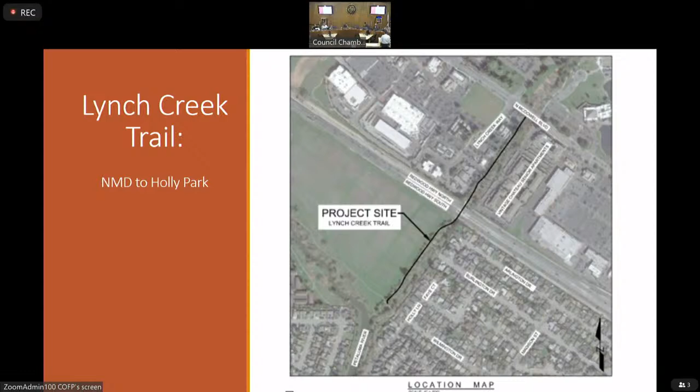So for North McDowell to Holly Park, we're going to make improvements at the roadway there, and then going in, it's a degraded asphaltic concrete pathway, so we're going to want to take care of the actual pathway surface, as well as drainage, and as well as putting in some striping. Some of the items here: we work with a biologist to go through and cut back the vegetation, do that at the right time of the year. We're going to clean the drainage, we're going to seal the cracks. And then the mitigation for those cracks is to put an actual geotextile fabric on top of them and then put another layer of asphaltic concrete.

Gonna try to do as much graffiti removal, just clean up the whole thing. We want to make it sparkle. And the wayfinding signage may not be in this initial contract, but Bjorn has a lot of really good ideas, and we definitely want to do the right thing to get people inbound, outbound, on the pathway, and then marking and striping it.

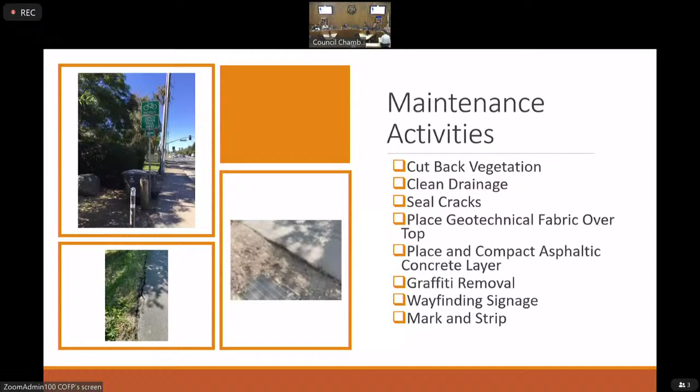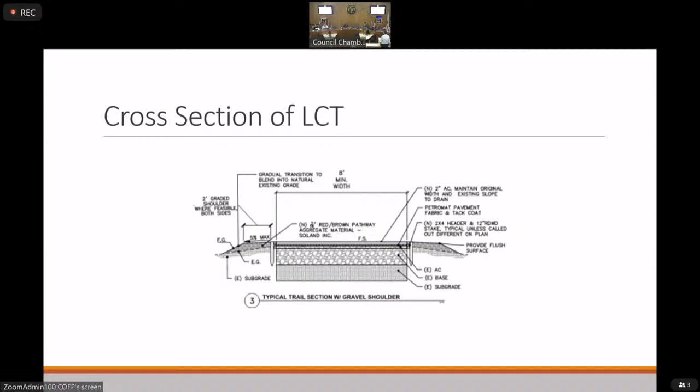And then as we go up to North McDowell, from the very first time I rode there, I never liked that intersection. So we're going to go ahead and do some striping and lay down a little bit more asphalt there to improve the connectivity and the usability of that. So if you're on your cargo bike with a trailer, can you make that maneuver? Yes. Now you can get on the sidewalk.

And I will say on this whole area, the connectivity of Lynch Creek Trail to Lucchesi, we have a separate project that we're going to look at the improvements that are needed, and we've been very fortunate to get some money from SCTA to do that work. The contract has been signed, so you're going to start hearing about that as we move into 2024. And Bjorn, don't hesitate if you think there's something we need to add on any of that.

But just in a nutshell, what are the improvements we can make? We can make improvements on the signalization. We can look at a future overpass. We can look at going under. There's a drainage culvert there. They do that on the peninsula a lot, getting under 101. So we're going to make improvements on that whole connectivity.

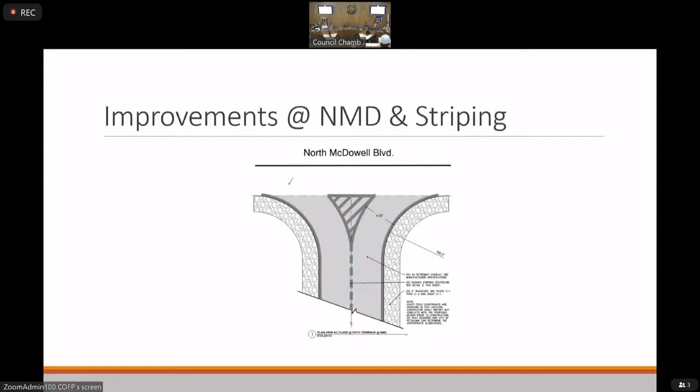And then we go from Payran to Edith, and this is going to be very similar to what you've already seen, the connection from River Bend or Edith Court to Lakeville, and also what we did by Holly Park. So we're going to improve the ADA access to Payran, which for me is very important, just getting up to the street. We're going to have an 8 to 10 foot concrete path. We're trying to get it as wide as we can within what we can work with there. Have the 1 to 2 foot quarry fine stabilized shoulders on that. Again, graffiti removal, look at the wayfinding and mark and stripe.

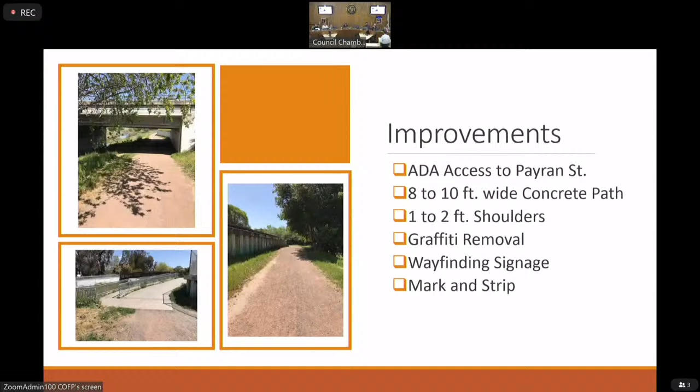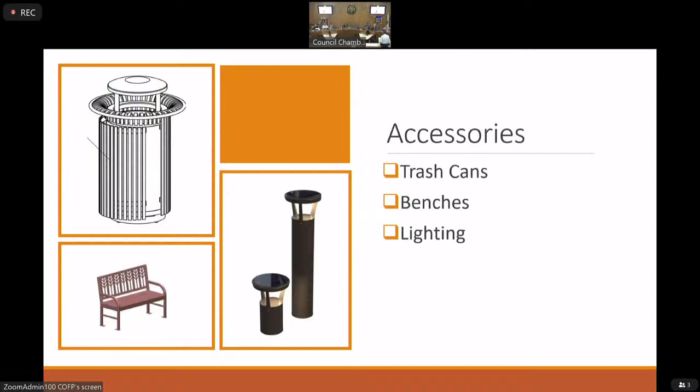So we're gonna have trash cans in locations. We've got 5 benches, and then we've got the lighting system similar to what is at River Bend, and that's going to be going in. That is solar. So, with that, I'll take any questions that you might have.

Thank you, Ken. Pamela, can we start with you? Thanks, Ken. That was great. Glad to see we're polishing this up. Like you said, I think it is a gem. What kind of lighting were you thinking is going to be included at the underpass? I wasn't quite sure if there was something on the slide that I missed. I saw the solar along the other section. Yeah. Wow, you drilled right in on that, Pam, and I thought about that, like somebody is going to ask it, so thank you.

So we've got a light standard up on the bridge. The difficulty is getting a meter, because we obviously can't do solar. Although I was sort of thinking, could we put a panel somewhere out there, but then vandalism and people stealing it, and that got too complicated. So I'm like, well, we're just going to go hook up to the light standard. We might be able to do it. It's kind of a separate project.

I looked at it on the arch. I'd like to get lighting on the arch, and with PG&E, we figured out how to do it. We just tie in here. It was very simple, and PG&E says no. The agreement, and Gina's going to know more and get into the details if you really want to know about it.

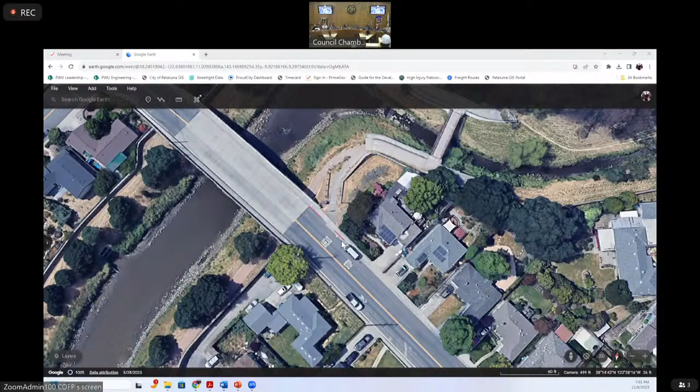Okay. Yeah. So then going towards the Washington side, there's a truck that usually parks there, and I think there's an open cyclone fence area now. But yeah, there is this bush. It's hard to see around. Oh, I see what you're saying. Yeah, hedge. I'll have to see. I don't think that's city property, but I'd have to check on it. We can look at that.

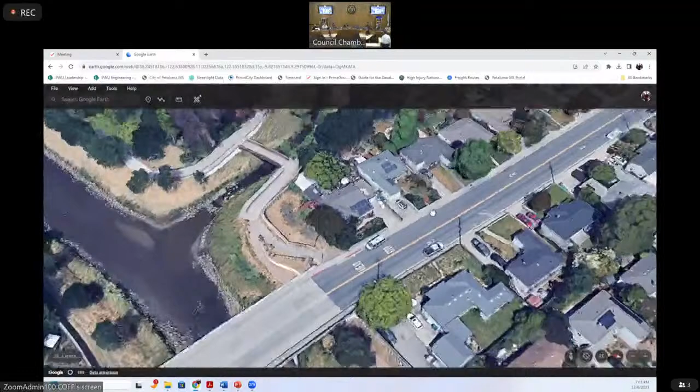I actually think maybe some more paint in the road there. We could do something to try to bulb that out. In fact, that was an idea. I think Pete might have mentioned it, but just try to do a quick build bulb out there and put some vertical elements to give a little more presence to it. And I met with a neighbor. They were nice. They didn't mind losing the parking space. I was like, good. But that's a good idea. We could definitely do something there.

And I will say, we've spent a fair amount of time just on the striping in this section of Lynch Creek Trail. We don't want people whizzing down there, so I'm trying to narrow the pathway, put speed gradation markings in. We use it for motor vehicle traffic. We did it on I Street, so I'm doing the same thing here. I get complaints that those electric bikes are going too fast, and so just to give some presence on the pavement there, so it doesn't look like a highway to cyclists that are going really fast. So, yeah. Thank you.

Yeah. Kelly, I know you just arrived. Do you have any comments to add? Okay. So with that, we'll open public comment. The public is invited to make comments on this item. Public comments are limited to 3 minutes per person. If you haven't done so already, please fill out a speaker card and bring it to the clerk. Clerk, have you received any comments on this item prior to the meeting? There were no public comments received. Thank you. And I don't have any speaker cards, right? If I may. Please. Fill it out.

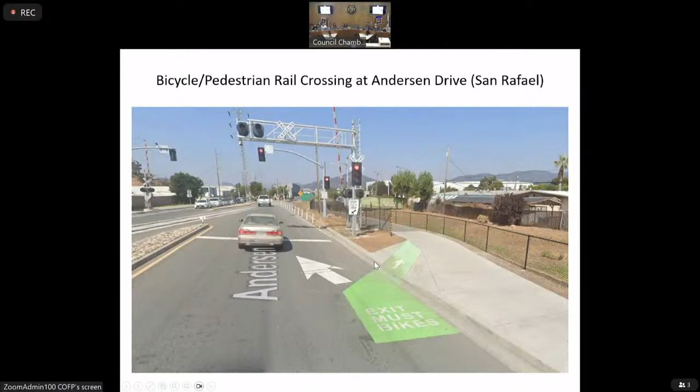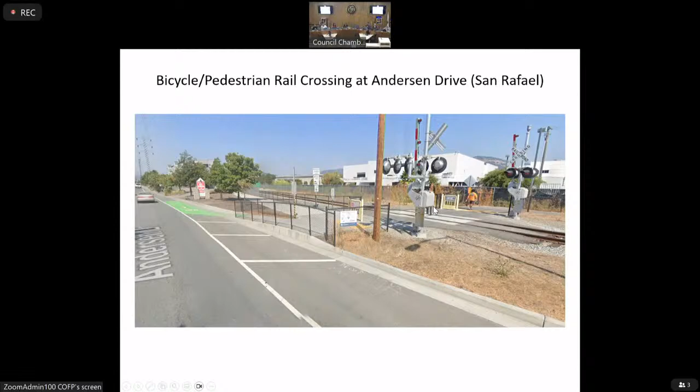Got some images here. This is what those ramps look like down in San Rafael, where you access the sidewalk. This is what one of the crossings looks like. You can see someone actually taking advantage right there. In the other direction, same idea. A ramp up before the rail crossing, and then again, here's your more controlled rail crossing. So that's just trying to help you visualize what will be in place on North McDowell Boulevard, again, with the ramps in both directions.

So a couple things I wanted to get your feedback on tonight. Again, the North McDowell Boulevard frontage improvements. So we are looking again just at the project site. No changes would be made to the southbound direction on North McDowell Boulevard. So that will still be the class 4 protected bike lane that we have in place today, up until that signalized crossing with the new and improved sidewalk and rail crossing.

So we want to focus in on this frontage on the northbound side of North McDowell. And I have a couple of cross sections there. And then I also want to get some feedback on Corona Road. I do not have cross sections there to share. But we'll go to North McDowell first.

So again, there's been a lot of back and forth between the city and even within the city, talking to fire about their requirements to be able to access the buildings on the project site. And we essentially have about 16 feet to play with here, where we can accommodate some combination of bicycle and pedestrian facilities and landscaping strips.

So this is our recommended option. This is consistent with the feedback that PBAC provided back in 2020 to make the most of that width and basically maximize it by providing a two-way multi-use trail that would allow people to walk and bike in both directions along the north side of North McDowell Boulevard along the project site.

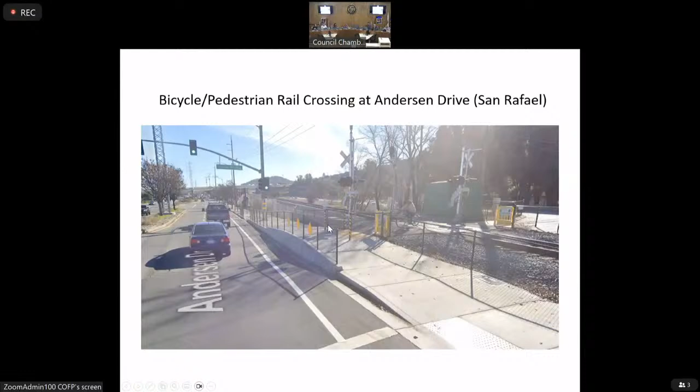Gosh, I haven't seen this lately, but I do remember it from a bit of time ago. I'm looking at the page which is titled North McDowell Boulevard, Corona Road to SMART Tracks. I guess I have questions. If we were to do option number 1, where we're talking about a multi-use trail for bikes and peds, would it be striped? Yes, we can stripe it. We could do edge lines, and a dashed center line would seem appropriate.

My second question is, are there going to be power poles allowed in this area? No, I would have to double check, but I believe all of the utilities are being undergrounded. Okay. Looking down at the very bottom of this page, you referenced this Class 1 trail would provide adequate width for two-way travel for people on foot and bike.

What constitutes adequate? So for a class 1 trail, the minimum width is 8 feet with 2-foot shoulders. And so in this location, we have 12 feet. And the planting strip could count as shoulder space. Basically, you need a little bit of a shy distance or a buffer from any edges of curbs or vertical objects. But 12 feet is sufficient. Great, thank you for that. That's all I have. Thank you.

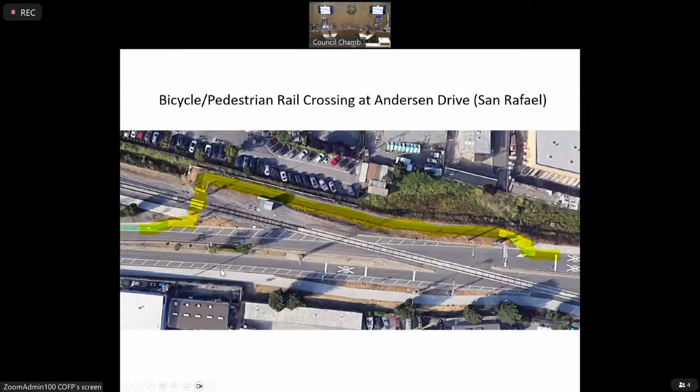And then can you go back to the other one? I'm leaning towards this one, but on this one, is there a way that the planting strip could actually be some sort of water catchment or something like that too? So that it's not just channeling water off, but it's actually catching it? I believe so. Could double check on that, but I believe so.

Okay. And then would there be any trees over on that side of the street too? And if so, where would they be, in the 4-foot planting strip, or over to the right of the 12-foot multi-use trail? So I'm not sure if we have any in the planting strip. Tree placement on this project has all been driven by fire for their access requirements for a ladder truck. Because the buildings exceed a certain height, that triggers some access requirements.

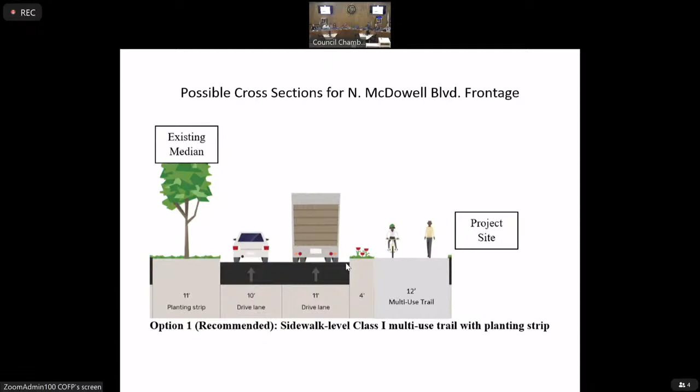I know we are working hard to maximize the tree opportunities. I know there are some on the project site, to the right of the multi-use trail. Okay. Not sure if we have any here, but there may be. That's an ongoing conversation. Okay. And then on the original drawing that was included with the staff report, sorry to make you jump around here. So I was just looking at the Meridian web page on the city's website.

So my feedback is I think the 12-foot multi-use path is probably the better option, and I would want that on Corona Road as well. I share the chair's concerns about sending bicyclists up to the roundabout there. And just thinking like a kid riding their bike to school on Corona Road from this affordable housing development, would you have your kid ride their bike on Corona Road up to Corona Creek Elementary?

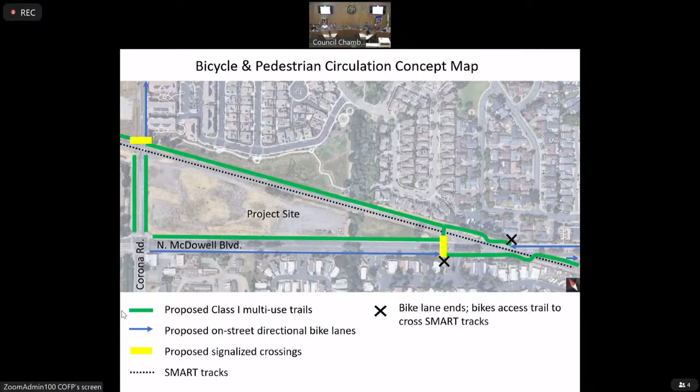It would have been nice to know where the connections would be from the new Danco project, and also the layout of the parking lot. But generally speaking, I'm inclined a little bit more towards option one. A question I have is with respect to option two, with the 6-foot bike lane. So the idea would be you'd have cyclists passing each other in opposite directions in that area? They're both using that space, or they're on the other side of the street, and that's your expectation?

So the expectation in this option is that because of the width, it's only intended for northbound bikes. And then anyone biking southbound, the expectation is that they would be riding on the other side of North McDowell. Yeah, I wonder if that would really happen, based on use and people getting on this area from the new affordable housing or from SMART.

And can you say a little bit more about what kind of on-pavement signage there would be if we went in the direction of the 12-foot multi-use trail to help people understand shared uses and speed and these kinds of things? So I was surprised it didn't come up in Ken's Lynch Creek Trail presentation, but the general striping for multi-use trails includes a white edge line on both sides to define the edge of the trail, and then a dashed yellow center line. If you go to Marin County, most of their multi-use trails are striped this way. We'll be doing that on the Lynch Creek Trail.

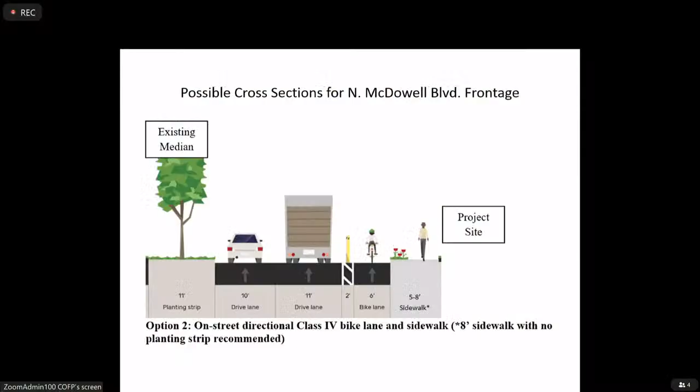and thinking about just the flow of people coming out of the SMART station, and how that kind of creates a T a little bit, that flow coming out, and then they hit North McDowell and can go left and can go right. And I don't think there's enough space, but what I was trying to think about was having something that's almost just ditching the landscape planting basically for that section and just really maximizing the space for people to move. I think there's going to be opportunities for landscaping everywhere, but this section in particular just seems like you really have to fit as many people in there as possible.

This was an example that came out of Boulder that was like tall curbs, so kind of half the size a regular highway barrier might be, but it just struck me as a cool example, and I don't even know if it's legal in California, but as a way to still feel protected, just another option for us to maybe consider, again, not knowing the legal ramifications, but in this application, just thinking how that could be nice, trying to incorporate public art too. You can only do so much with bollards to paint them.

So this gives a sense of that continuity that you can maybe still provide a little extra level of protection too. So yeah, the proposal is to expand that front part, get rid of the landscaping and just try to think of something creative to be able to separate traffic. Because I was thinking like a two-way cycle track, but I don't think there's enough space for that. You need way more than that. So just really maximizing that multi-use pathway space.

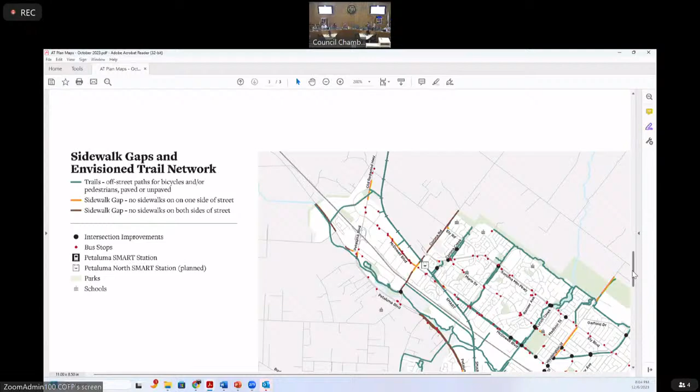Based on these envisioned trail maps, are there prioritized projects currently? I know funding comes up and that changes, but do we have a list of prioritized projects? The existing prioritization is done by city council through the adoption of the annual CIP, capital improvement project budget. So any projects that are currently in there have been identified as a priority in some form by the community and city council.

The active transportation plan will have its own prioritization criteria applied, which Fehr and Peers has presented on a couple of times to get feedback on what criteria we apply. So this plan will generate its own priority project list, and then staff and city council will have the benefit of that list to inform future budgets and figure out which projects we're prioritizing from the active transportation plan. But if we're going off of the existing bicycle and pedestrian master plan, we really don't have that.

So after this plan is approved and adopted by council, then there will be priority within their budget. Well, that's still subject to their discretion every year when they adopt the budget; they ultimately decide what goes in it. So this will be a resource for them and for us as staff. Okay, thank you. I'll probably ask you this question in a couple more months. It's okay. Thank you. Sorry. Okay, Brian.

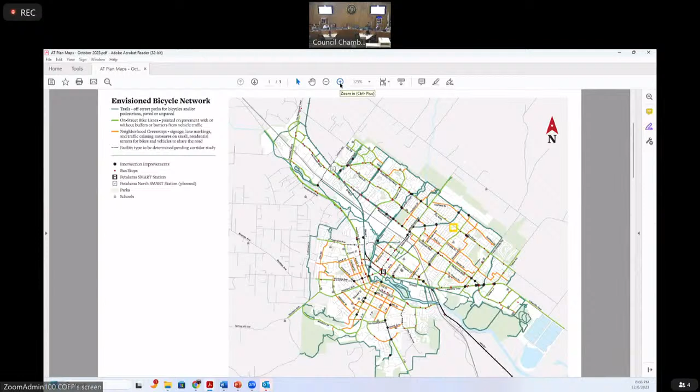Just a couple questions. Some of the most controversial streets right now are essentially undecided. So can you say what the process is, or what you'd like us to offer in terms of facility type to be determined pending corridor study? Some of those are where I might have my strongest opinions. Great question. Right now we have one on Corona Road. We've got the narrower stretch of Payran. We've got Bodega, Washington, the narrow stretch of Lakeville, and then Mountain View.

Really all of those, there was a very high level feasibility analysis. I don't even want to call it an analysis. It was basically myself and Jeff Rubendahl with our knowledge of the constrained widths of each of those roadways, saying we really don't know how we would get a bike facility in here without some major changes to the roadway configuration. So it's probably something that warrants a study, but that's certainly open to feedback from PBAC and the general public. We've gotten a lot of comments about East Washington Street, and it is helpful to know which of those studies is a priority. Do you agree that a study is necessary? Just tell us what you think, and we will try to make sense of it.

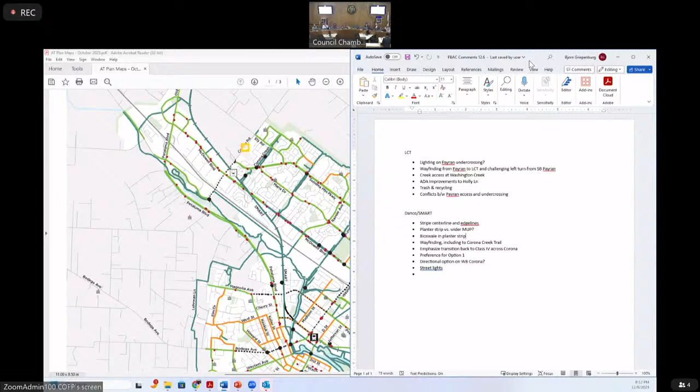Also, some of the roads in here, I guess it's a little surprising or confusing. Like I Street is identified as orange, as a small residential street for bikes and vehicles to share the road. I guess I was surprised to see that. So it's hard to tie all the pieces together.

I'm looking at the second map, and it looks kind of barren. So I'm trying to envision taking what's on slide one and figure out how do you connect all these straggling trails together, which I think is the goal. So it's a little hard to make the mental leap from slide one to slide two and try to figure out, are some of these light green ones going to be all ages and abilities or not? So I don't know if there's a way of making that more clear.

And I'll stand on my soapbox again if I can, just to remind you all about the 2030 Vision Zero and climate goals, and to keep that in mind, that if y'all are serious about doing that, we're almost in 2024 here. And to try to make as many of these roads as you can all ages and abilities accessible is important. If kids can't ride on the road safely, then parents can't get out of their cars. And that's what we're all trying to do, especially with e-bikes and all the other options.

I just got an e-bike a few days ago and I'm ready to get rid of our second car. That's a great way to get around town if only we didn't have to worry about getting run over. So thank you all very much. I think it's great. I'm really glad you're all doing it. Just keep up the good work, and let's try to make it so we don't have to be in our cars all the time. Thank you.

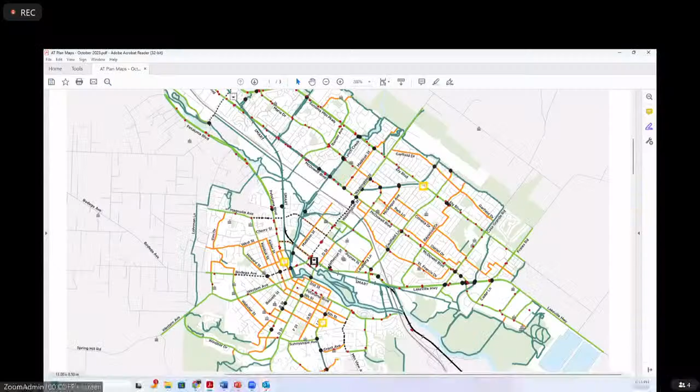Okay, looking at, I guess it's now time for this kind of thing. Looking at the trail network map, which is the map on the second page. I was just out on Gossage walking with a friend, and I looked at the map just to kind of track where my friend and I had walked, and I was quite surprised to see the fact that Gossage is listed as a trail, and Gossage is anything but a trail. It's a class 2, the way I look at it, but it certainly isn't a trail.

Private ownership on both sides of that roadway might make it very difficult to buy the land that you need in order to build a trail. So that was one thing I noted. Looking on map number 3. Sorry, maybe I can just respond or address your comments individually. Sure. So this connection you see here, it was envisioned actually in the 2008 Bicycle and Pedestrian Master Plan as part of the rim trail system.

Right. And so that's not an existing trail. It's a vision, and it will obviously happen in a piecemeal fashion, I think, over time, if at all, or maybe some sections do come to exist. But that just kind of skirts the whole western boundary of the city. That's why you see that we carried over all of the projects from the 2008 plan. No, I recognize that. It's just what you're asking us to do tonight is... Yes, yeah. What do we do? What do we say?

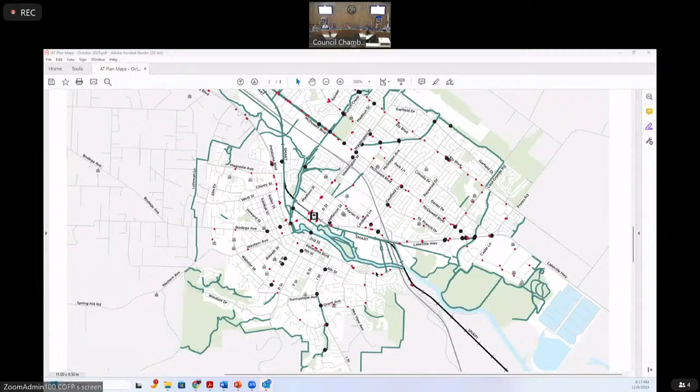Like Mr. Felix, I also recognize that since this is a trail network, we need to update the area that we just talked about, the area between North McDowell and Corona and the new subdivision that's going in along with the SMART train. That whole area needs to be updated. I don't think we had that listed as a trail in any fashion. Yes, you're right. Along the frontages, yeah. And then looking at, let's see, on the sidewalk gaps and envisioned trail network. Oh, we just talked about that one.

There are a few areas in here that suggest there is no sidewalk, and I beg to differ that there is a semblance of sidewalk, but that's something I could list out for you and send to you rather than going through it and taking the good time of the committee. Yeah, that'd be helpful. Yep. And the same thing would go for the map reading that says there's no sidewalk at all on either side when there is, so I can include that as well. And again, everything else on that map is basically about existing sidewalks that I either think are there or think are not there. So that's really all I have at this moment. Thank you, Marcia. Franklin?

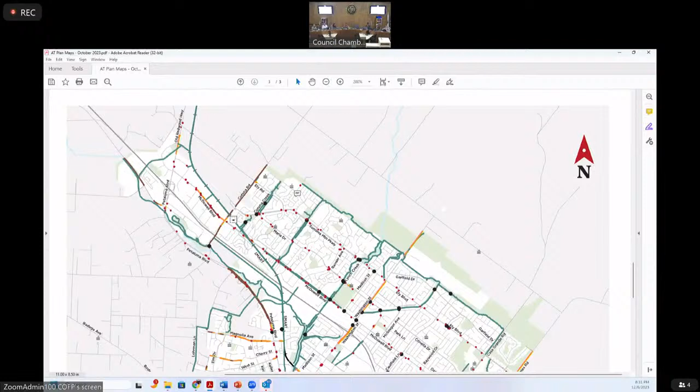And my last question is, I know we had a public comment on this. Will the comments and suggestions be incorporated into what you're doing now? Yes. The comment we had from Robin? Yeah, we've got a big folder of all of the comments that we've received. And it's helpful actually to have all of this archived for grant applications. I'm learning.

We even looked at, with the social pinpoint, it was pretty easy to identify which corridors received the most comments. And my recollection was that D Street was one of, if not our top source of comments on the social pinpoint map for bike ped improvements, mostly between downtown and Lakeville, and the Lakeville intersection received a lot of comments on its own. So, yeah. Thanks. Brian?

Awesome. Sorry for not sending my comments in sooner. So on Western Avenue, I know there's some crossing issues there at Fair Street that's not listed, that we've talked about. Bodega Avenue crossings at Bodega and Upham and or Park and Baker. Both those are pretty treacherous. Echo the comment about Corona Road.

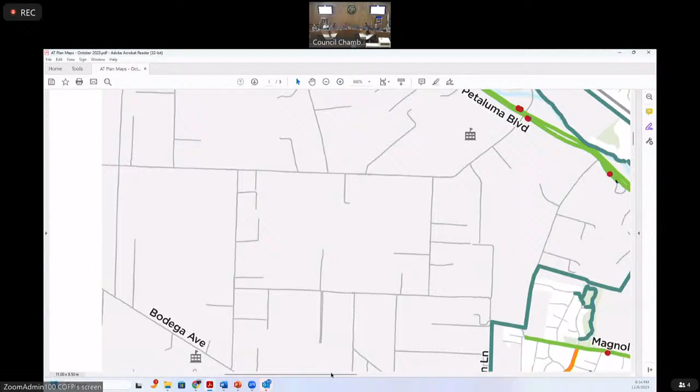There is a gap on West Street that I think is worth calling out, where it doesn't go down to Petaluma Boulevard. I think that's important because there's no way for people on West Street to, it's kind of a hill to go from West Street toward downtown. So you might want to go down to Petaluma Boulevard or go down to Keller or something. And you're not going to go to Magnolia if you're going to go to the fairgrounds, for example. And so I think we need to continue that West Street one down to Petaluma Boulevard.

Yeah, so we actually looked at this neighborhood closely because of the hills and the opportunities created by the grid. So I'm excited that you brought it up because this is a chance to talk through it a little bit. So we've got the 5th Street neighborhood greenway that comes up here. You need some intersection improvements at Washington to get people across onto Keller. Keller is a pretty gradual uphill up to Prospect.

And then from that point, if you're envisioning a connection that gets around this really congested area of downtown at Washington and Petaluma Boulevard North, you would use Keller, turn right on Prospect, turn left on Kentucky, which is again one of the more gradual hills, and then you've got the new signal at Oak and the new trail down at the North River Apartments. So that's one way to connect through that area.

And then we were envisioning that if people are biking anywhere up to the Cherry Valley area, they would use Keller Street, slightly lower traffic than Keokuk, a little more gradual, less hilly. Basically trying to not force people to bike on these steep hills up towards Oak Hill. But yeah, point well taken that we don't have a connection on this section of West.

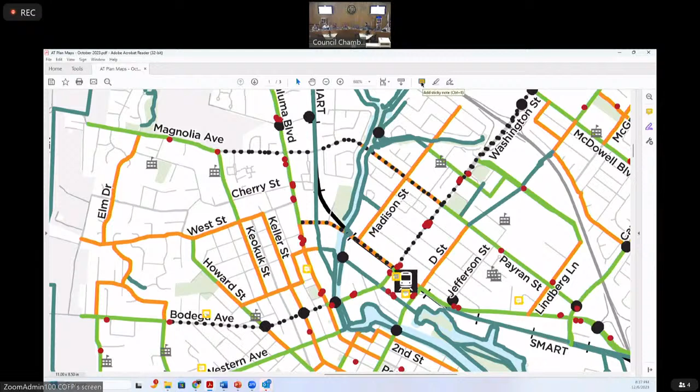I guess my bigger point is, like I said already, there's going to be a lot more people going to the fairgrounds. And when I look at these maps, I think to myself, if I'm riding to go play pickleball at the fairgrounds, what route am I going to take from different places? So there's a lot to think about with getting people to the center of the city safely, because it really hasn't been a destination to this point. The only reason you'd go there is to go to Target, and you're probably driving. But there's going to be new reasons to walk and ride your bike there.

I don't know how you capture the Lakeville to Payran on D Street, like making it a one-way street and implementing that vision, but I'd love to see that put in there. Sorry, that was the gap on Lakeville. It's not really a gap that's listed in here, but I think it could be a trail. I think D Street from Lakeville to Payran could be one way. Oh, I see. This section. Yeah, I think it could be, and it could become a better path and a stronger connection there.

And fun fact about that: that was actually envisioned as Petaluma's first neighborhood bike boulevard. Now we're calling them neighborhood greenways. So that was probably a project that was ahead of its time when it was originally proposed. Right, and with the fairgrounds now being a destination, I think it might be worth dusting off.

And then in general, some of our public commenters touched on it, but when we look at Sonoma Mountain, for example, these wide roads that are 2 lanes, and trying to get to carbon neutrality, we have to ask ourselves, are we at peak car right now? And if not, when are we? People are going to move here, they're going to have cars, but also people are getting e-bikes and ditching cars. So I don't know if there's any policy assumption you can make that we're going to be transitioning 2-lane roads to 1 lane. Washington, obviously, that's putting a dagger in the heart of car culture.

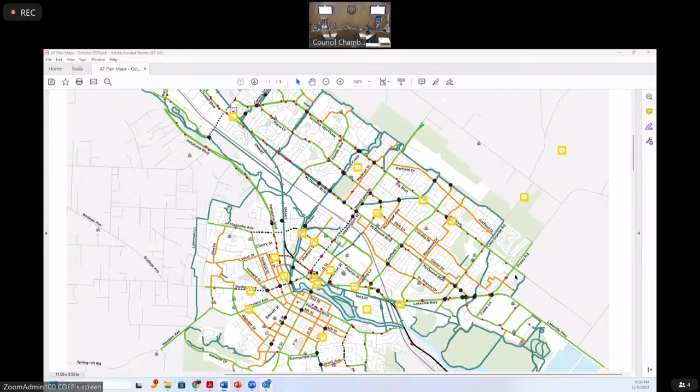But our goal is to try to get priority projects out of this for a grant application for the next cycle of the Active Transportation Program. And that call for projects will be out in about spring of 2024, and I think those are due in the summer. I'm looking at Adam because he works for SCTA. Yeah, so that's a big driver right now, to identify priorities. Even if the plan hasn't been formally adopted by council, it would be nice to know with some certainty what our priority projects are. And then our plan is to submit a whole package of priority projects and hopefully get them all awarded and then be able to get the real key gaps closed.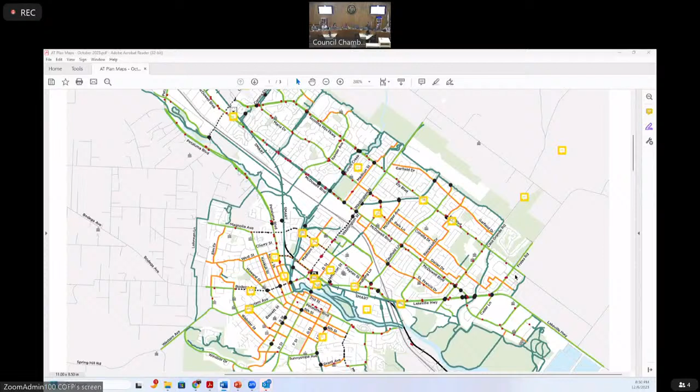Thank you. Yeah. I'm not a GIS person, but I love maps and looking at maps, and I think we all do. And I just want to appreciate that this has been challenging for everyone, you included, to figure out how to make this map succinct and digestible and include as much information as we're trying to do. And there's just no perfect way to do that. And it's been hard. And I want to appreciate your comment, Pete, that the plan is only as strong as its weakest link. I like to be an optimist, but that's a really important and pragmatic way to move forward from here. And I just appreciate all the work that has been done on this. And I look forward to your analysis.

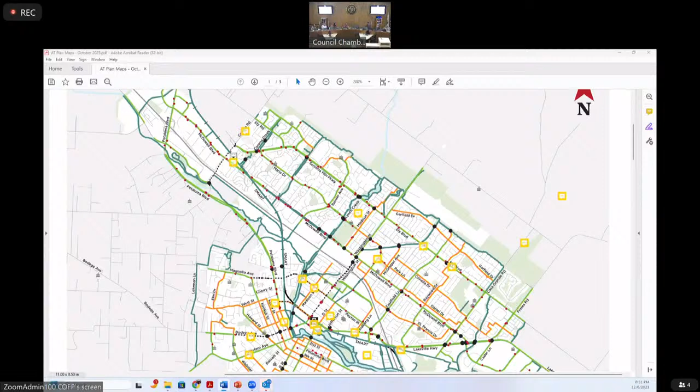So we will move to committee comment now. During committee comment, members are invited to briefly share updates relevant to this committee, including liaison reports from other city bodies, and make requests for future agenda items. Dialogue between members should be limited to clarifying questions and answers. There will be no public comment on this item. And I will start with Marja.

So this is committee comment, right? Okay. Yeah, I have one comment to make. I've been attending meetings in Santa Rosa where we have been talking about a lot of the things that we talk about here. And I was pleasantly surprised at our last meeting that one of the gals presented the fact that bike share is coming back. You all remember that? I think our ad hoc committee was finally disbanded because we were waiting forever for this bike share program.

But it sounds like the bike share program right now, they are finishing up the contract, and they are looking at a 2-year pilot program with, again, 300 bikes, which hasn't changed since the first iteration of this. And maybe it's time where we need to take a look at what we want Petaluma's bike share to look like. And maybe we need to reform the ad hoc committee with the transit or what have you.

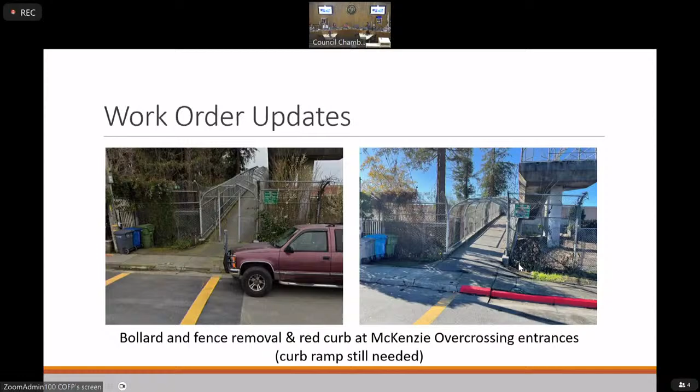So as Councilmember Barnacle highlighted, our crews recently got out and cleaned out that entrance to the McKenzie overcrossing, and yes, it still does need a ramp. So we will hopefully try to figure that out. Obviously, anytime you start doing concrete work, it's a little bit dicey, but we are aware of that need.

And our Safe Streets nomination program, my inbox is on fire right now. I think we get two of those every hour at least, it feels like. So that's our program where we are asking residents to call out areas where they'd like to see traffic calming or other safety improvements. And as of December 1st, we'd received an average of 7.5 nominations per day, 369. It's definitely at 400 now.

And there's a URL where people can go ahead and nominate. So we'll be scoring a big batch of projects sometime over the winter. We do have to manually get these all in GIS because they're not necessarily tied to the way the form works. They're not tied to location. So that'll take a little bit of work.

Our communications team, Jessica's here tonight to represent them. They've done a wonderful job with the Slow the Fast Down campaign. And you're probably seeing the banners and signs all over the city. Jessica, I believe, brought some here tonight. You can take home a yard sign with you if you'd like. And we've also got bumper stickers, car magnets, stickers. And I know they're planning on a lot more activities and mediums to get the word out.

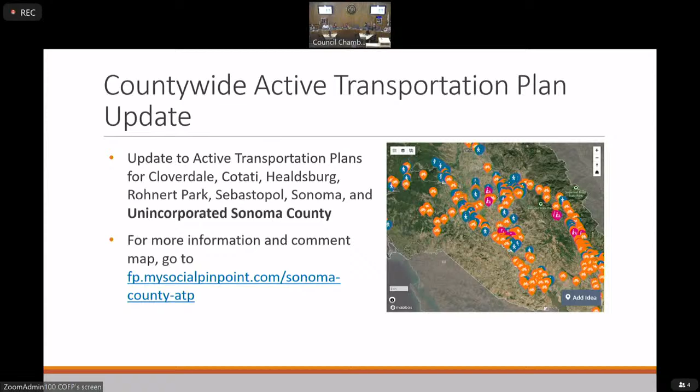Likewise, we received a lot of comments that are out in the county. So we will be doing that data exchange to make sure that we're talking to each other. We're aware of the feedback that both efforts are getting. But if you have any comments on improvements you'd like to see, especially on the unincorporated roads just outside of the city, this would be a great way to get that feedback in.

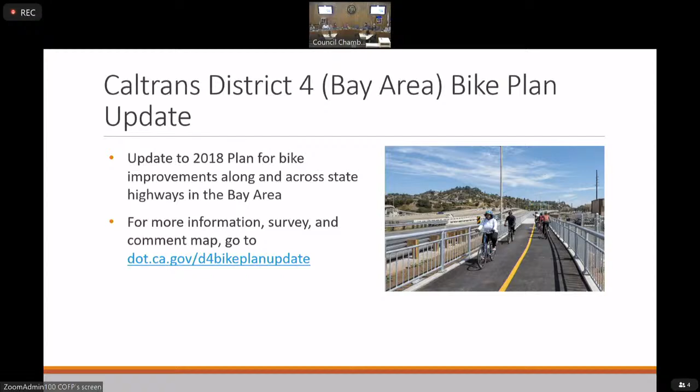And likewise, Caltrans District 4 is updating their Bay Area-wide bike plan. So again, for us, what's most relevant here is the Lakeville corridor and anything touching 101. And so they've got a survey and a comment map as well.

Can the city include the lighted bike parade in an upcoming community update email? Just knowing that it's only on Facebook, it'd be good to blast that out. It was in the last one. It was in the last one? Okay, good. All right, so that's all I've got.

Oh, and I didn't mention, I wanted to grab some pictures today. We did just have some work this week done on Garfield Drive. The striping is wrapping up there. They've been adding the painted bulb outs and signage out in the street. And likewise, there's a crew doing some painted bulb outs on Jefferson Street, at Jefferson and Vallejo, in response to a collision earlier in the year involving a 5-year-old boy who was hit while crossing Jefferson Street at the Vallejo Street intersection.